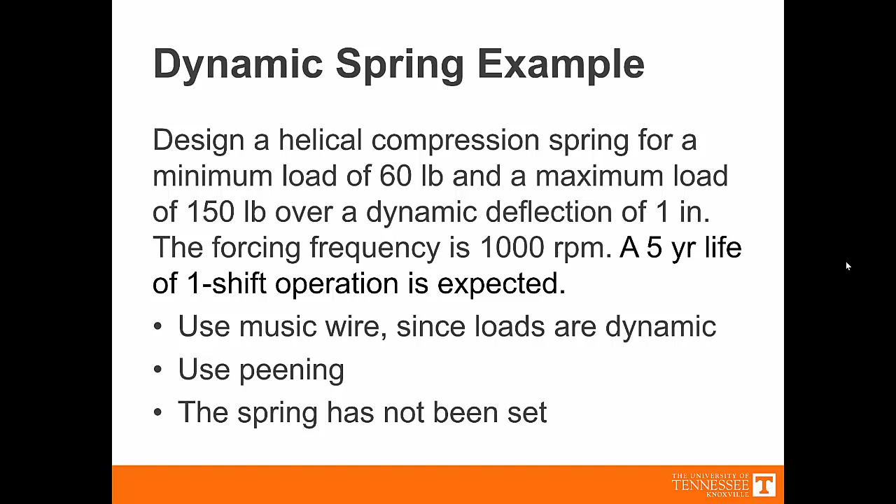The forcing frequency is 1,000 RPM, so it's running at 1,000 times per minute, and we're expecting it to last for 5 years of a single shift of operation. We're going to use music wire, since the loads are dynamic. We're going to use peening, which we discussed in the previous lecture, and we're going to recognize that this spring has not been set.

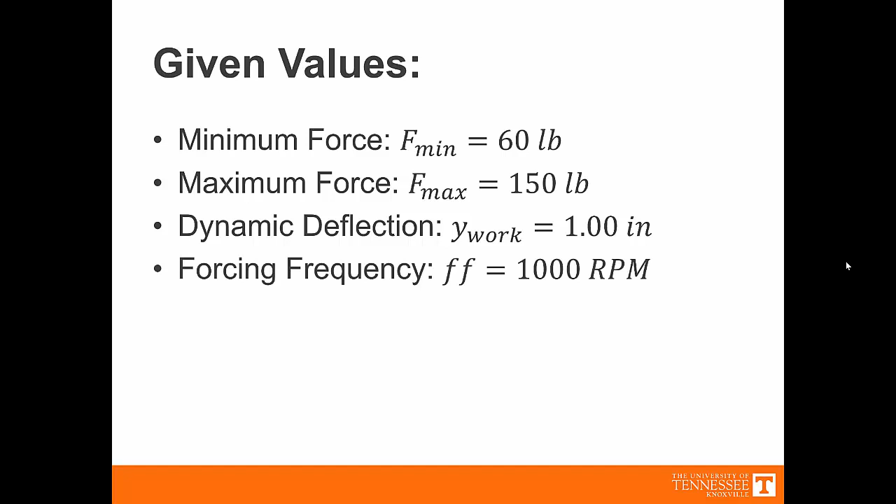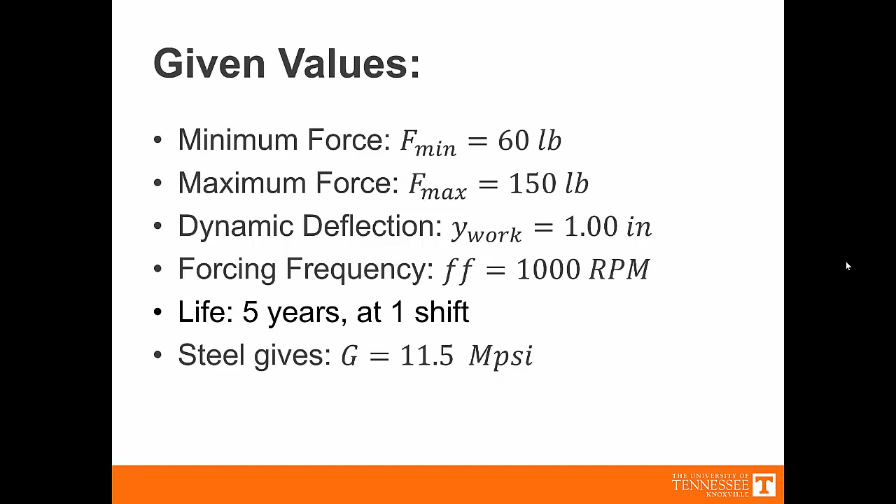So let's turn that into given values. Our minimum force is 60 pounds, maximum force is 150 pounds, our dynamic deflection, or Y work, is 1 inch. We have a forcing frequency of 1,000 RPM, and the life is 5 years at 1 shift. And then finally with steel, we have a modulus of rigidity of 11.5 MPSI. So let's start with some things that will be constant across the problem.

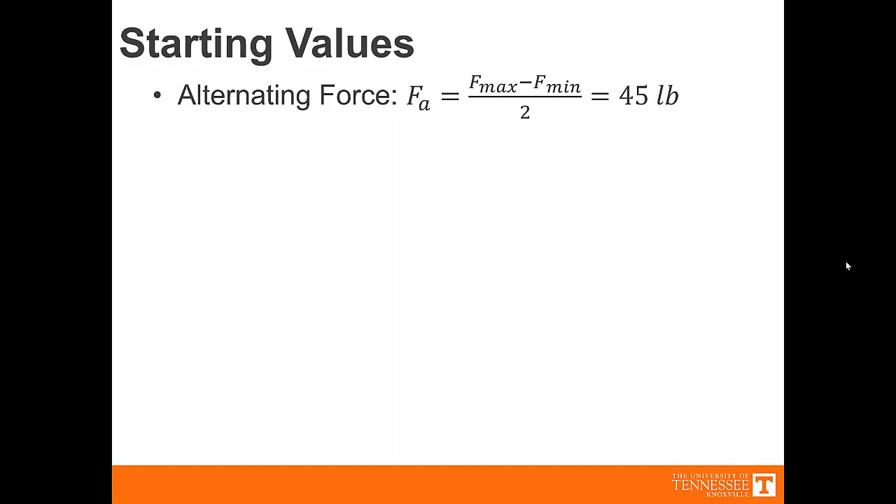The first one is the alternating force. Like we've done in most of our fatigue problems, we have a maximum minus a minimum over 2, and so 150 minus 60 divided by 2 is 45 pounds. We also have a mean force, which is 105 pounds.

Cycles per year, just walk through this. What we mean by 1 shift is how long something is working for a typical work year. So that is 40 hours a week and 50 weeks a year. So that gives us 2,000 hours per year. And revolutions per minute, it's 1,000. And there's, of course, 60 minutes in an hour. So we have 1.2 times 10 to the 8th cycles per year. And we're going to do this for 5 years. So our final answer is 6 times 10 to the 8th cycles.

All right, we're going to go ahead and pick a wire at this point. So the wire we're going to choose is 0.207. If you remember from last lecture, the reason we chose to find SN curves for the 0.207 is so that it would be ready for this example. So if you're not familiar with the SN diagram generation, it would be good to go back and look at that video. But we're going to go ahead and assume a diameter of 0.207, and we'll also assume a spring index of 9. So that means that the coil diameter is 1.863.

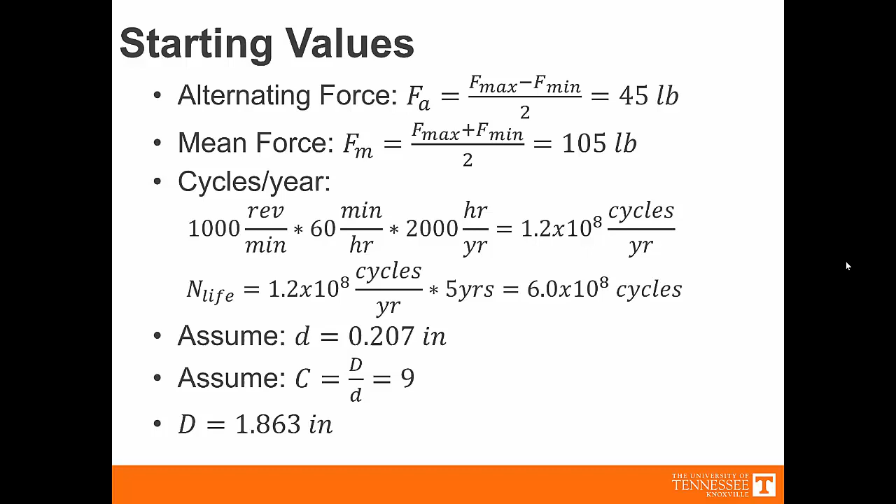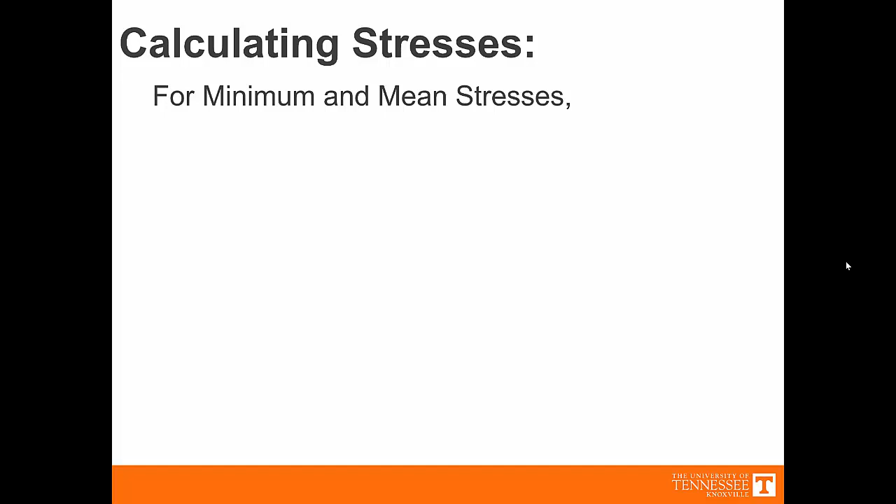The next step is to calculate the stresses. And so we're going to do two different equations for stresses. We've seen both of them already. For the minimum and the mean stresses, since those are constant numbers, we're going to use that the shear stress is equal to Ks times 8FD over pi d cubed. We can calculate Ks. So applying this equation, first for the minimum stress, the minimum shear stress is equal to that equation with F minimum applied, and that gives us about 34 KSI. And then for the mean stress, we'll do the same equation, but now applying F mean instead of F minimum, and that gives us about 59 KSI.

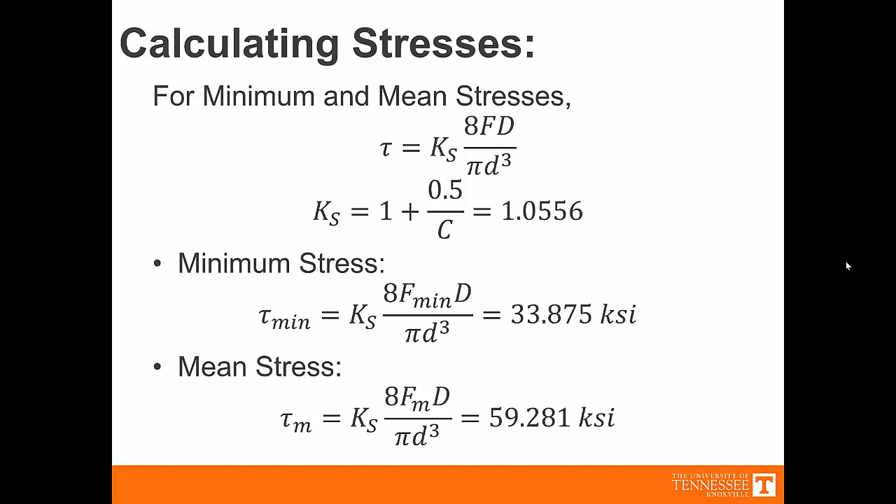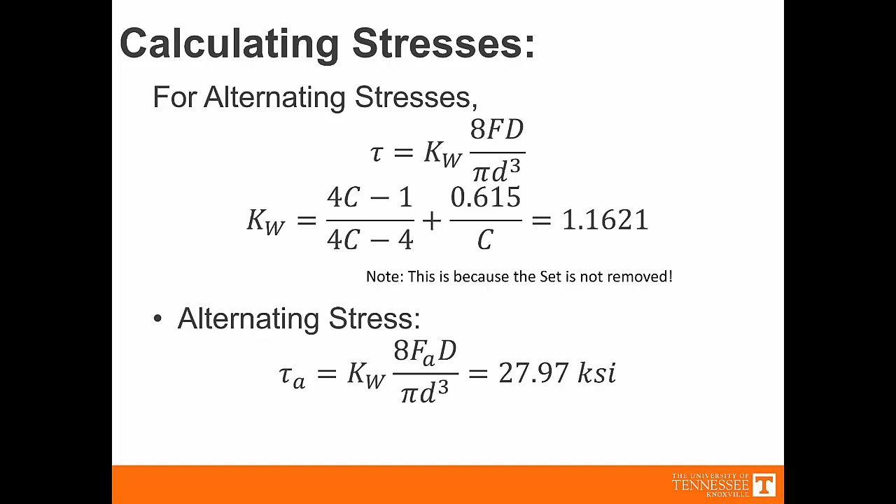For the alternating stress, we will need to use the Wahl constant instead of Ks, and so that constant's a little bit more. It's going to be 1.16, and so our alternating stress is again applying F alternating, and that gives us about 28 KSI. Just as a reminder, the reason we're using Kw, the Wahl constant, as opposed to Ks, is because the set was not removed. If the set had been removed, even though this is a dynamic problem and even though we are looking at the alternating stress, we still would have been able to use Ks.

All right, so from the last lecture, we calculated how to find all of the different values of strength of the wire at different numbers of cycles. So we looked at 1,000, we looked at 10,000, at 1,000,000, and then finally we found that the endurance strength occurs at 1 times 10 to the 10th cycles. And so we have a static strength of 0.6 of the ultimate strength, which is 143 KSI. That's the yield strength. And our ultimate shear strength is about 160 KSI.

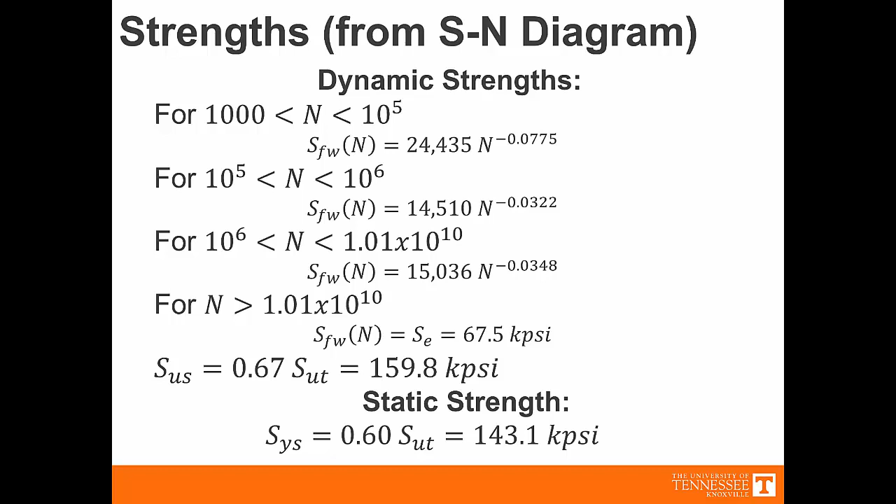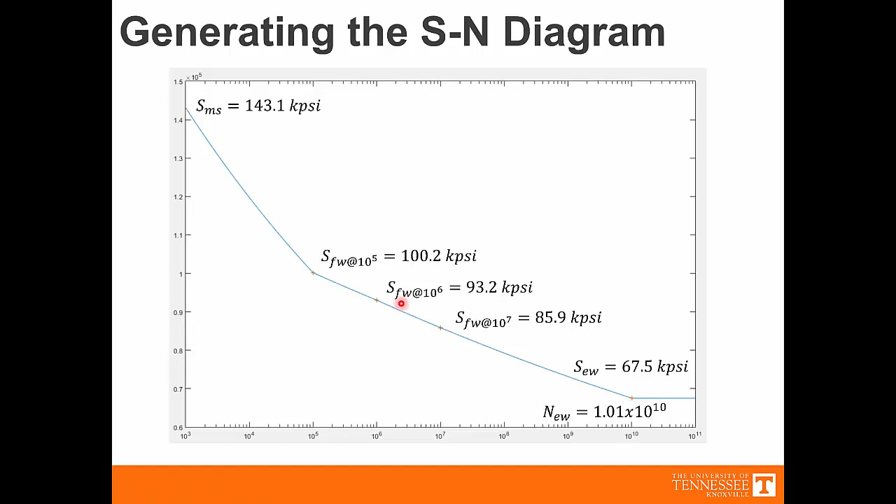And if you recall from the last lecture, we were able to create a diagram with different A and B values for each of these different ranges so that we could plot our SN diagram for the spring wire. Notice all of these strengths are talking about the strength of the wire and not the strength of the spring overall.

So the next thing we need to do is we need to look at our modified Goodman equation. The SN values that we've always done in the past, we're finding a strength up here on the top. So our SE or SN diagram, and when we looked at the modified Goodman diagram where we're comparing mean stress with alternating stress, we always did our experiments with all alternating and no mean stress.

That's different now. Because the springs were loaded with repeated loadings as opposed to fully alternating loads, the value that we've been calculating has been where the mean and alternating are equal. In other words, we've been calculating this line. So our wire strength is actually this point B labeled here on the chart, not what we typically have done in the past, which has been point C. So we're not looking at the fully reversed case, we're looking at the case where the mean and alternating stress are equal to each other.

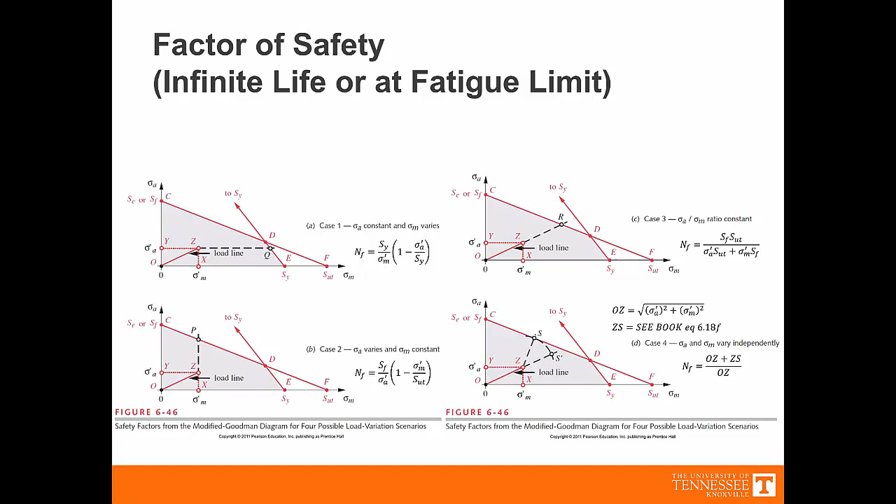So what we need to do now is we need to figure out how to convert this wire strength to a fully alternating strength or a fully static strength. And just like before, once we do that, we'll then have 4 cases. So going back to this modified Goodman line, the way we're going to find point C is simply by using triangles and understanding that this is 45 degrees. This is just basic geometry at this point.

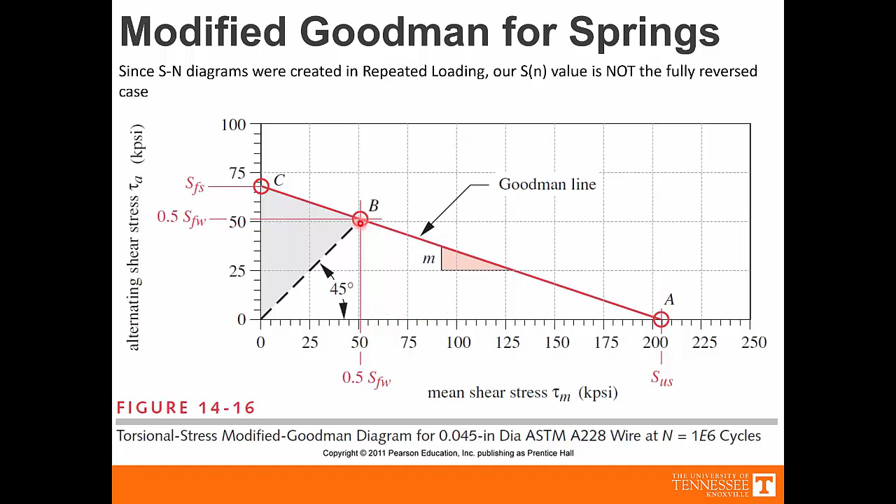So I'll fast forward to the end and say that we can find the fatigue strength in shear, and it's going to be a function of the ultimate shear and this wire strength that we calculated from before. And there it is. There's our final answer. So applying that, we'll have about 48.5 KSI.

Just to be clear, what I've already done at this point, this SFW was calculated using the number of cycles for our case. In our case, it was 6 times 10 to the 8th cycles. Going back to this diagram, 6 times 10 to the 8th is somewhere around here. So this was the number that we were calculating. That's the number that went into here and again here. So what we get out of that is actually a number quite a bit less, 48.5 KSI.

Now, before, the way we found a factor of safety was looking at this equation. And if you notice what we have here, we have a fatigue strength, we have ultimate tensile strength, we have alternating stress and mean stress. Those are the components of this function. We're not going to be able to use that function this time. Instead, we're going to use this factor of safety equation. Let's take a look at the differences.

The major difference that's coming here is a recognition that the preload is helping us. Notice here's our mean stress minus our initial shear stress. This is the shear stress coming from the minimum that will be applied. So what we've done is we're changing how much of the stress that the spring is seeing is alternating and how much of it is mean. And by increasing the amount of stress that is there all the time, we're decreasing the total mean stress that the spring is going to see as it stays there over time.

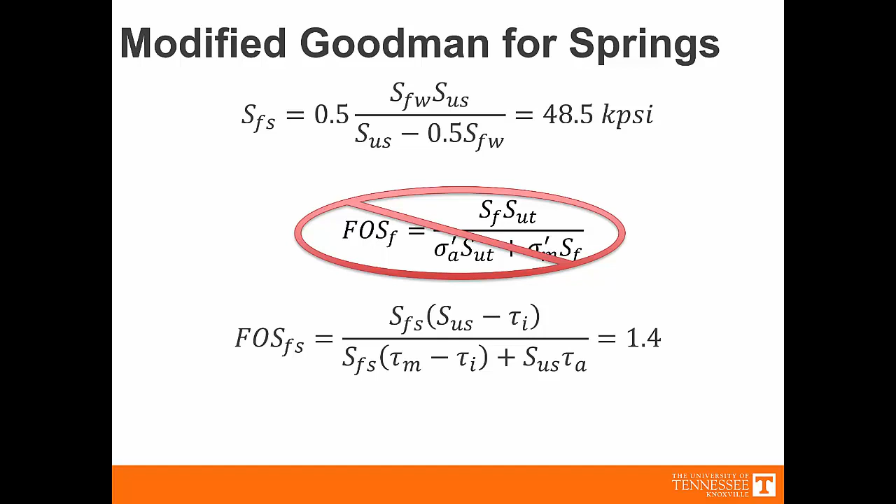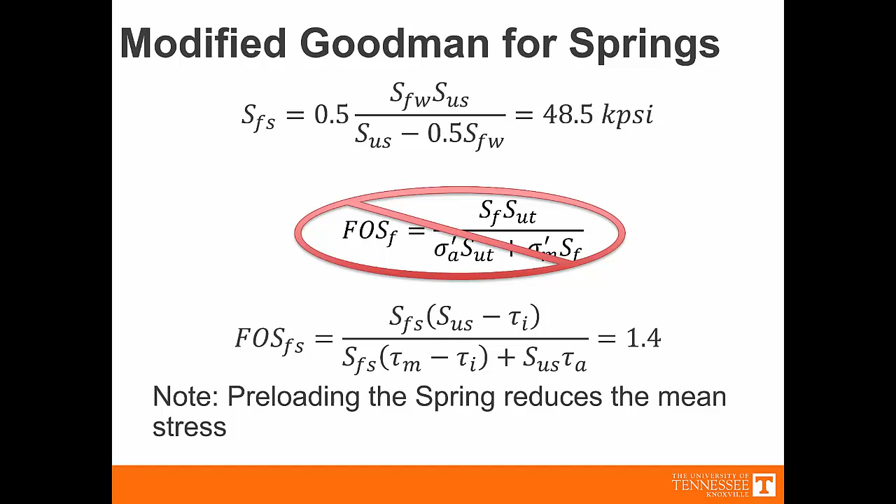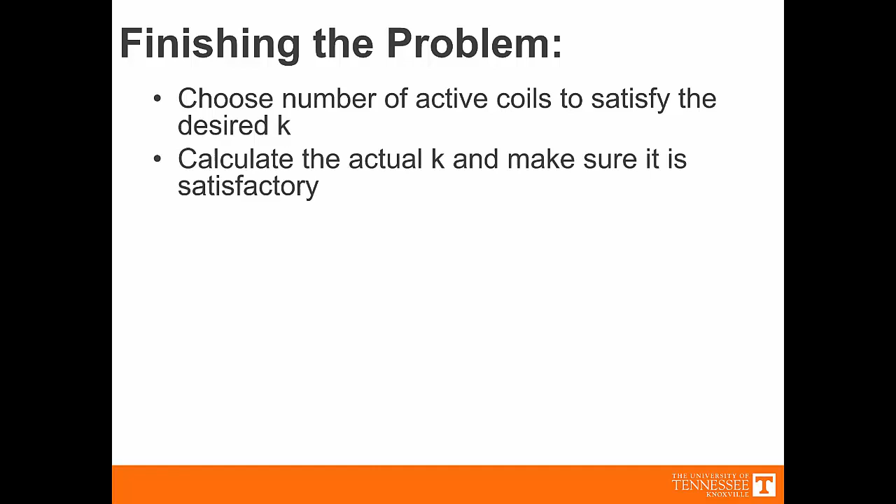So that gives us a factor of safety of 1.4. This is really important to understand that preloading the spring actually reduces the mean stress and therefore can increase our factor of safety. So from here, what do we do next? Well, we're going to choose the number of active coils to satisfy the desired K, and now it turns exactly into the same problem that we had before when we were calculating a static spring problem. So we'll find the actual K and make sure it's satisfactory, we'll find the total number of coils, the initial deflection, the clash distance.

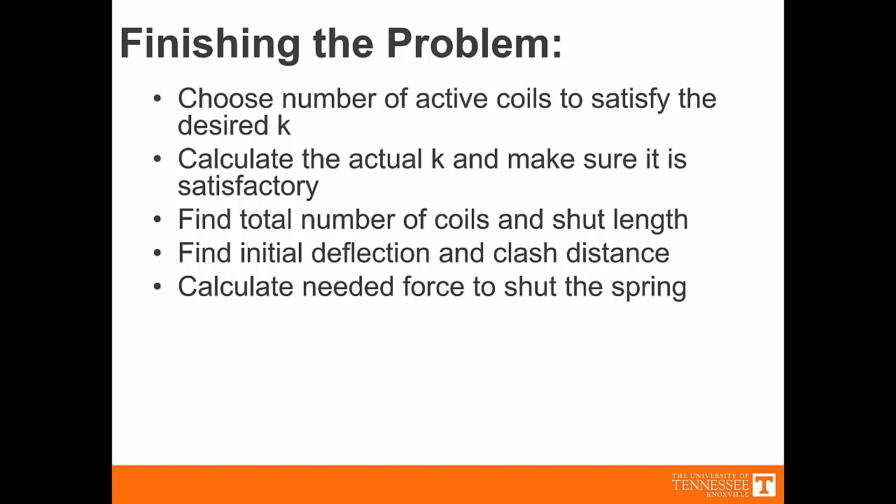We'll make sure that we still have a factor of safety for shutting the spring. I will mention for fatigue problems, most likely the factor of safety for fatigue will be conservative compared to the factor of safety to shut the spring. In other words, it's easier to shut the spring than it is to make it fail with fatigue. So we'll calculate a factor of safety to shut the spring, and then we also could check for buckling, which we won't do this semester, but in real spring design that is often an important component.

And then as the spring is oscillating, since it's oscillating at a high rate of speed, you also should check the natural frequency of the spring to make sure that the forcing frequency that the spring is undergoing is much lower than the natural frequency of the spring itself. And then report your final design decisions, and that finishes the problem.